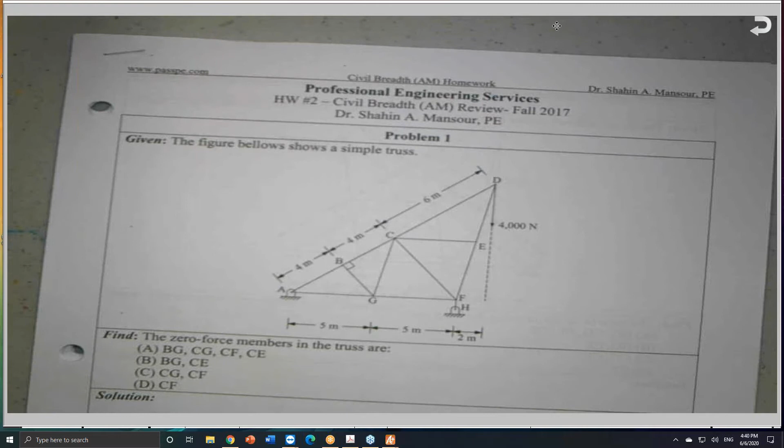The exams I sent you last time, if I remember correctly, were fall 2017 and fall 2019, exam 1 and 2. All these things were discussed or sent to you, 3 exams, and also the mini exams that I gave to those of you taking the class with me. So I would be glad to send all of them, I think 5 or 6 mini exams. Some problems are very similar to what is in these exams.

And also, by the way, I was teaching surveying today for California, and I decided to add 2 additional sessions for the California Special Surveying exam. The 2 sessions I added, I will make them free. I will send the ID for that if you'd like to attend the free surveying sessions, 2 additional sessions to help those taking the exam this month. I will send it to you also today. This is separate, so you have seismic and surveying. Let me get some paper here because I ran out.

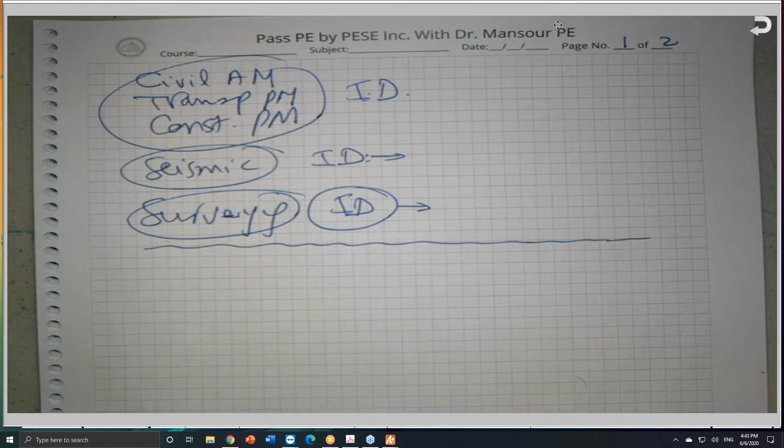For the exams, I hope that you get a chance to go over them, and I'm sure that you will have some questions, and I will be glad to answer any. I have all the solutions, some typed, some handwritten. It's just a matter of trying to push you or encourage you, let me put it that way, to do it on your own. At least you can challenge yourself, and when you get the solutions, you can compare it.

One topic that I received a couple emails from some of you about is Boussinesq's formula.

Boussinesq's formula is developed by this French scientist, and the increase in pressure due to a load can be calculated using this equation, or the nomograph that has been developed later on. So as all of us know, if this is OG, the original ground, and if you have a point like point A at a depth Z,

we have two types of pressure: the vertical sigma V and sigma H, horizontal and vertical. The vertical stress that will be developed at this location is basically due to the weight of the soil above this point A, whatever the gamma of this soil.

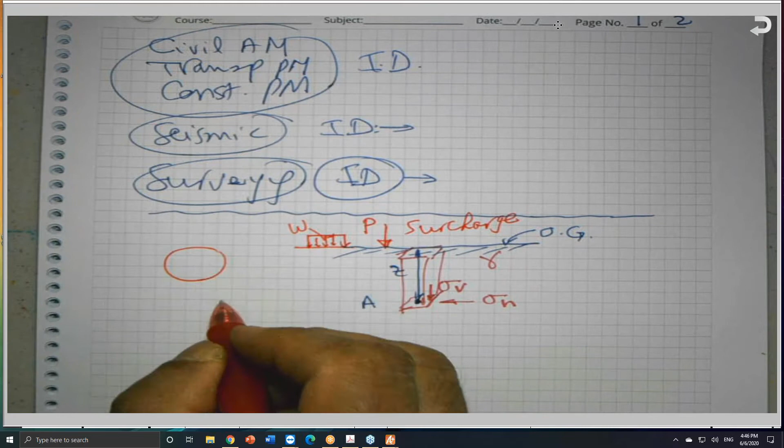And this surcharge could be either a concentrated load acting over a point, or it could be a distributed load, uniformly distributed. And this load, W, which is the uniformly distributed load, could be a rectangular load, a square, or a circular load, or a strip load, a strip over long, okay?

So whatever load we have on the surface of the ground, the OG, the presence of such load is going to increase the stress at point A, for example, due to one of these loads. And we need to know that. We need to know that.

You might be asked about this in either the AM or the PM exam. So the first equation that Professor Boussinesq developed is given as follows. Let me bring the equation and I will be glad to elaborate on it. In any geotechnical book or any review book, you will find this equation. Let me bring the equation. The equation by Professor Boussinesq is given. If you don't have the equation, I will be glad to make a copy of this and send it with my notes. It's called Boussinesq's equation.

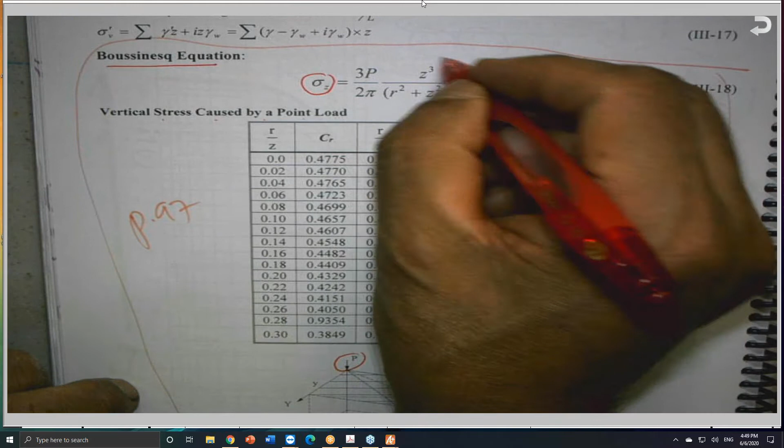This is the sigma z, the vertical stress caused by a point load. So the illustration that goes with this equation: if this is a point load P, a single concentrated load acting at point A here, and at any depth Z at a different location, I need to get how much the increase in stress due to this concentrated load. So this is what they call the vertical stress increase due to a point load.

This is the equation that I'm sure you saw before: under a concentrated load, 3P over 2 pi z cubed divided by r squared plus z squared raised to 5 over 2. Or we can use some kind of factor, c sub r, based on r over z, and they developed this table for us in order to get this coefficient c sub r. So you could use the original equation, or you could use the coefficient c sub r based on r over z. What is r over z? R is this distance here, the radial distance, radial.

R is equal to the square root of x squared plus y squared, so the radial distance equals the square root of x squared plus y squared. If I can get r over z, where z is the depth - how deep this point is below the load, and where this point is in relation to the load. If the point is immediately under the load, then r is equal to 0, because there is no x or y. But if the point is far away from the concentrated load by a distance x and distance y, we can get the radial distance using the Pythagorean theorem. So this is the original equation listed in geotechnical books.

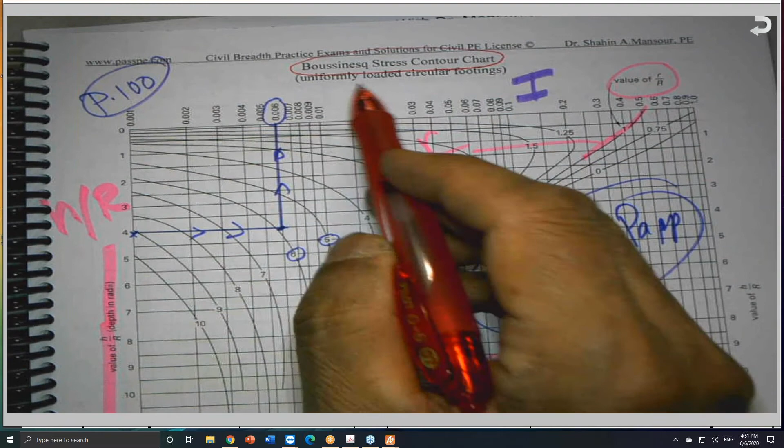After that, the Department of Navy took this equation and translated it into nomographs or graphs. So it is a Boussinesq stress contour chart. This is one of them, and it is for a circular load. So one map or nomograph is developed for circular load - so if the load is in the nature of footings, a circle or a column.

So in this case, with a circular load, we can find the additional stress. This is 2R, where R is the radius, so 2R is the diameter, D. So if you have a load in this nature, and you have the value of this load as a distributed load intensity, and if you know how deep it is - here using H instead of Z - and how far from the center of the load, call it R.

In this case, we can use this equation: delta, the increase of pressure, is equal to I times the application of the load - this is W, or the applied load. So I is called the influence value or influence factor.

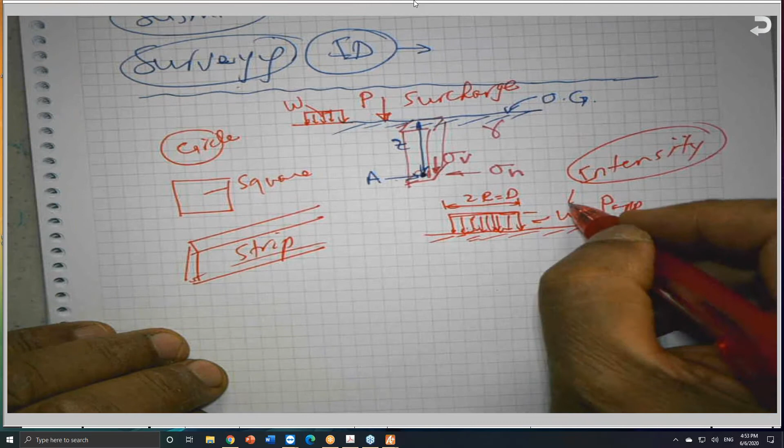Based on that, at any point at a depth H or Z, as he called it, at any distance from the center of the load, I can find what delta sigma V is - equal to I, the influence value, times W or P.

And these charts are available - I can send you a clean one if you want. This is for a uniformly distributed circular footing, and they developed one on the following page for a long strip footing, for a square footing, and there are many different formats available in most geotechnical books. So we need to understand how we can get the additional increase in stress due to a load acting.

I believe, if I'm not mistaken, there might be a problem here in one of the samples I sent you last time. If not, I can grab another set of questions - I might find one of these problems. Let me grab one of the problems in one of the mini exams.

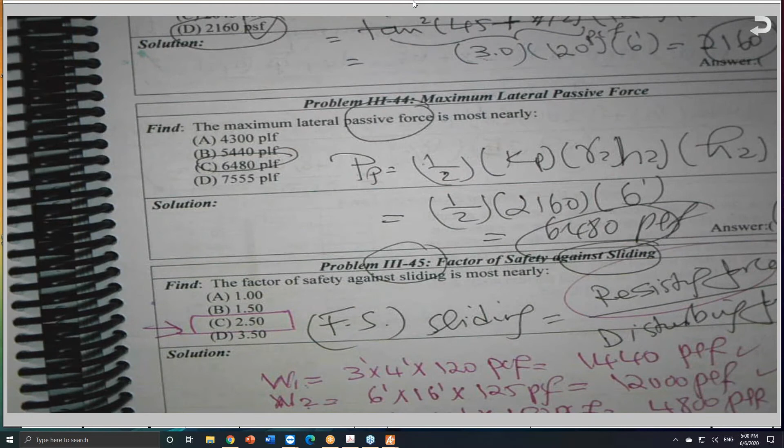It is not handy for some reason, so I will skip it until I locate it during the break, and I'm sure we will go over it. But basically, I can use one of my problems in this book here - I have two mini books in chapter 3, and we can apply it. After that, for the circular one, I can find it. For example, here is a problem, just one of the problems in one of my books.

A 1,000 pound point load acts on the surface of the ground. What is the stress increase 5 feet directly below the load? So basically this is a straightforward application. If I have a point load of 1,000 pounds, and this is the OG, he is asking what is the stress increase below the OG, at 5 feet under.

So this is 5 feet, H or Z, and this is point A. We are looking for the delta sigma V, the stress increase, and he's talking about the vertical stress.

In this case, the equation I showed you, the Boussinesq formula, I can apply directly. Sigma Z equals 3P over 2 pi, times Z cubed divided by R square plus Z square, raised to power 5 over 2. Or if I'd like to use the factor, C sub R times P over Z square. Either one will give me the answer.

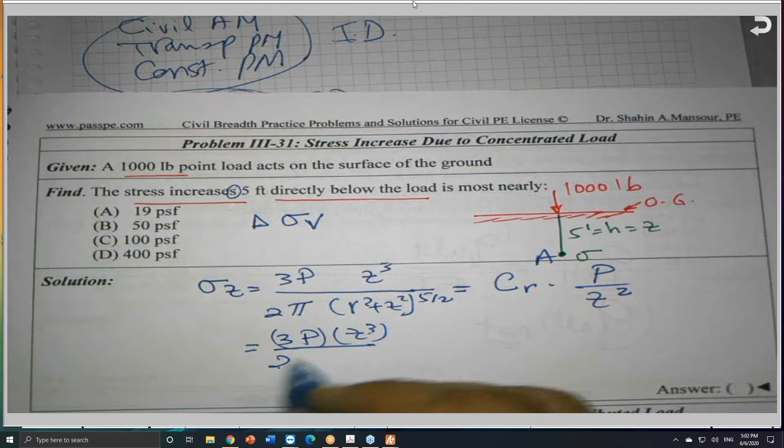Since this point A is immediately under the load, the radial distance is equal to 0. So I can say that this 3P and Z cubed divided by 2 pi, and since R is equal 0, this is Z square raised to 5 over 2.

I can plug the numbers now. The load P is 1,000 pounds, and Z is 5 feet, cubed, divided by 2 pi. Z square is 25 since 5 square is 25, so 25 raised to power 5 over 2. You will get an answer based on this equation.

If I decided to use the C sub R factor, I will go to a table like this, available in all geotechnical books. Since the load on the surface is a concentrated load, and the point is directly under the load, the radial distance is equal 0. So R over Z, R being the radial distance as illustrated in this diagram, will give me C sub R of 0.4775.

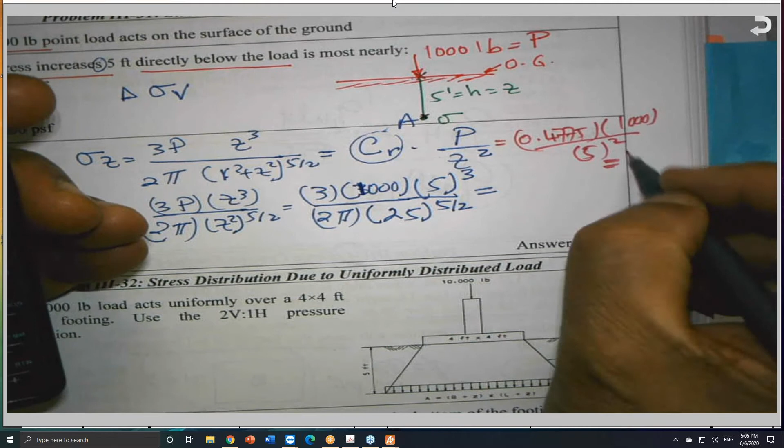This is an easy and straightforward problem. This is the increase in the vertical stress due to the presence of a concentrated load.

And this problem could be modified. Instead of directly below the load, it could be 5 feet away or 10 feet away, or he can give you a diagram where the load acts somewhere, and this is the point of interest. He will give you dimensions X and Y, and ask what is the increase in vertical stress. This is easy and straightforward, and I'll be glad to make a copy of this when I send it.

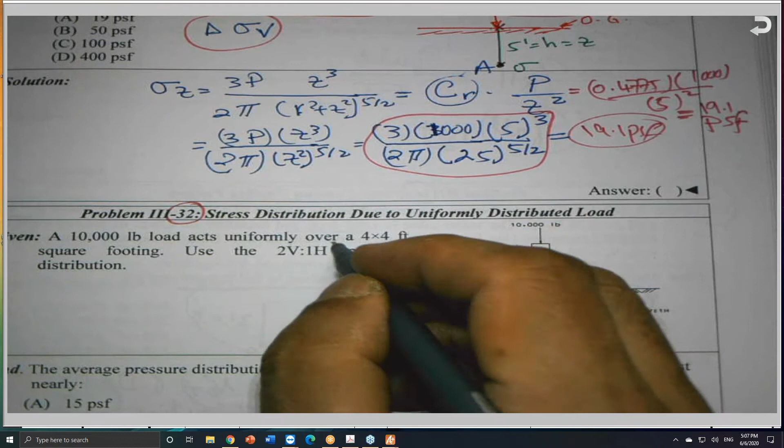But let me, since we are here, discuss another problem about stress distribution and average stress distribution using the 2-to-1 distribution method. If you have a load like this, 10,000 pounds, acting uniformly over a 4 by 4 square footing...

We know sigma equals P over A, this is normal stress or axial stress, P over A. So the stress at this level is 10,000 pounds divided by the area, which is 4 by 4 - how many PSF, pounds per square foot, since this is 10,000 pounds over 4 feet by 4 feet, a uniformly distributed load. We normally assume the load generates a uniform stress, except near the load where we have stress concentration - nobody will ask you about that.

But if I have a surface 5 feet below, what will be the average stress distribution on a plane that's 5 feet below the footing itself? So the depth here is 5 feet. One concept is 2 vertical, 1 horizontal.

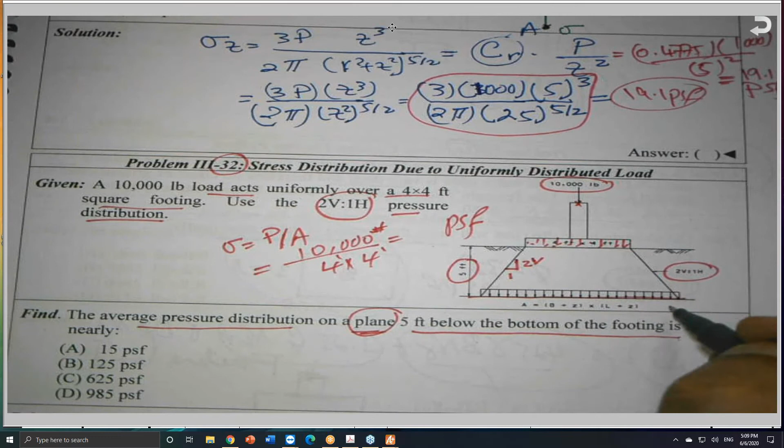Concept: 2 vertical, 1 horizontal concept could be used. So the surface area here, this 4 by 4 - right now the dimensions B and L, if B times L is square, in this case B equals L. But normally we express it as rectangular, and if given as a square, B equals L. At a depth Z, using the two vertical, one horizontal method, the new surface area is going to be B plus Z times L plus Z.

Because if this depth is Z and this represents 2V, the horizontal is half of it. So I have Z over 2 on each side. So half Z on each side, I will add it to the dimension B, and the same story with the other dimension. So this is the new surface area that will be available at a depth Z.

So in this case, we can say that the average stress, sigma vertical, is equal to the load, whatever the load is, 10,000 pounds, divided by the product of the two dimensions of that plane, which is B plus Z times L plus Z.

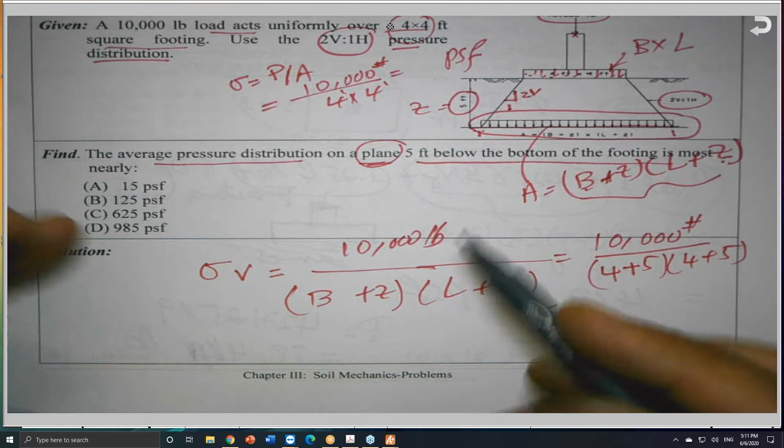B and L are equal because it's 4 by 4, and the depth is 5. So 4 plus 5 times 4 plus 5. So this is 10,000 divided by the surface area, which is 81, 9 times 9. So it gave me about 123.46 PSF. And this problem here, the closest answer is A, 19.1. And here, the closest one is 123, so it is 125.

So the stress increase or the stress distribution is very, very important. This is something that I need you to be aware of.

So the other cases, the one I was talking about, they are important and they are really sometimes tricky. And while I'm talking, I remember the problem, the one I was referring to. I may have it, and I did. I remember where it is.

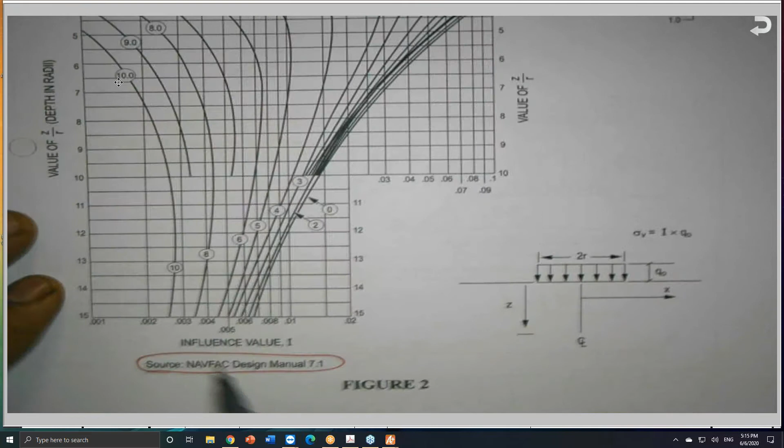So each footing is carrying 200 kips, a concentrated load. This is circular, so I can get sigma equals P over A. So the uniform stress that will be acting on each footing is P over A. P is given to be 200 kips. And the area, since the diameter is given to be 12 feet, I can say the area is pi D squared over 4, or pi R squared. I will use the diameter, pi D squared over 4.

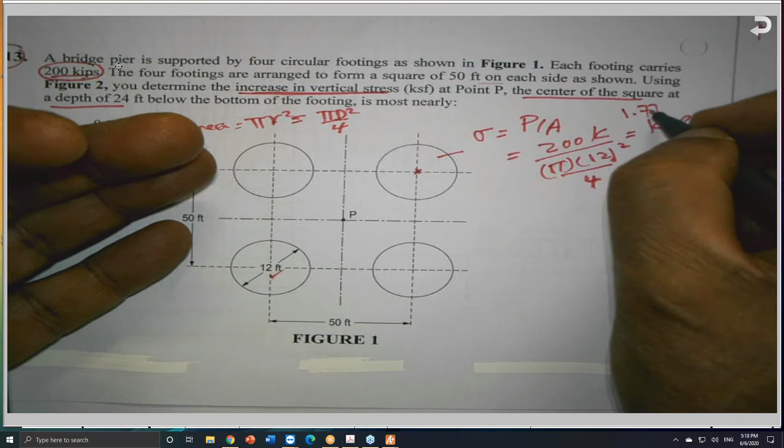So this is the first thing that I will do. I will convert the concentrated load into a uniformly distributed load over the footing as given.

The second step is, this is a circular uniformly distributed load, but the point that he is interested in is not under the load, is not at the edge of the load, but here.

And this is a plan view, by the way. This is a top view or plan view, whatever you like to call it. You are looking from the top.

So in this case, I need this dimension given and this dimension given. This is 25 feet from here to here and from here to here. But if you look to figure 2, the one they sent, or the one attached to it,

they are saying that if this is 2r, either uppercase R or lowercase r, they mean the same thing. So this is a circle like this, and he called this 2r, which is a diameter. And this is the center line. And this is the distributed load.

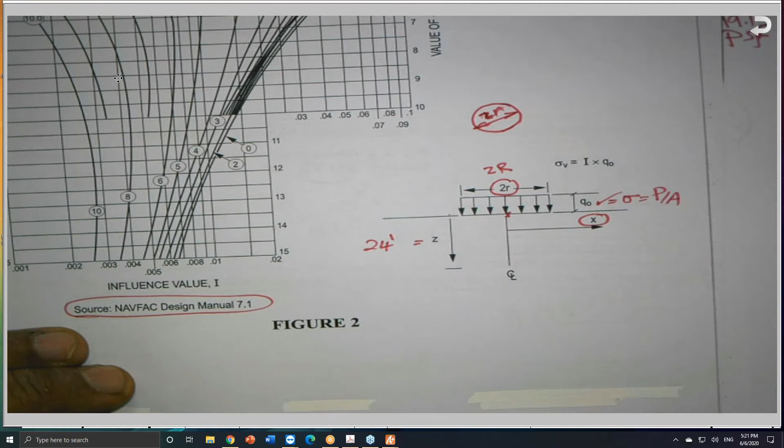But this is the center line. And this is the dimension X. If the load is exactly under the center of the footing, X equals 0. But as we move away from the center line of the footing, we need to know what is the distance X.

Because this nomograph, how it works, we have an X-axis and Y-axis, and we have some dimension in the middle. So the X-axis is the influence value I. This here, or this here, or this here, all these are I's, which is going to be used to plug into this equation, that sigma V equals I times Q sub O, or times sigma, as I define it here.

So this is the X-axis, these are the values. As far as the Y-axis, which is this vertical, it is the value of Z over R, depth to the radius.

The depth is Z, and the radius is given to be, this is 2R. That 12 feet, by the way, that's given. This is 2R, either lowercase or uppercase. Some books are using uppercase. So I know the R, or R equals 6 feet, because 2R is 12. And Z equals 24 feet.

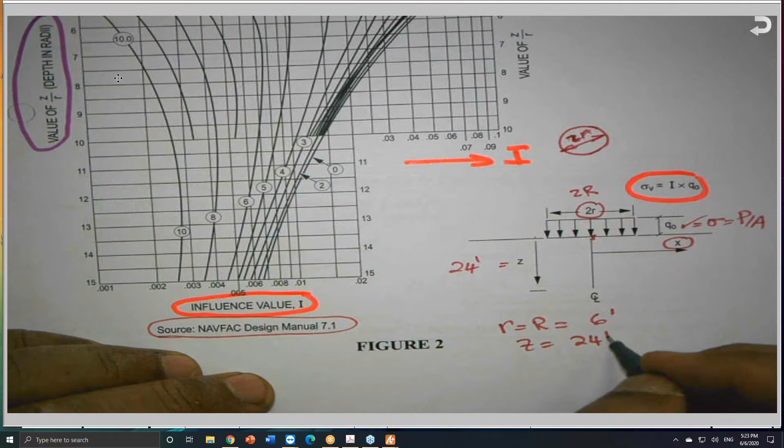So in order to get Z over R, I will say that from here, Z over R equals 24 feet divided by 6, equals 4. So this ratio is 4. And this is what you will see here, this is the vertical Z over R.

Now we are coming to the distance X, which is a series of curves as shown here. I'll use the green. It is the X over R. R is not the radial distance, it's the radius. So these here, they are X over R.

So these curves here, let me just highlight one of them. Not necessarily that one, the one we're going to use, but basically all these are the X over R. So I need to get X, and R already known to me.

And this is the most difficult part of it. If you look to the plan view of the problem, we need to determine which one is x, such that I can divide or get the ratio of x over r. Where is the distance x? The distance x, according to this diagram, is the distance measured from the center line to the point, whatever the point is.

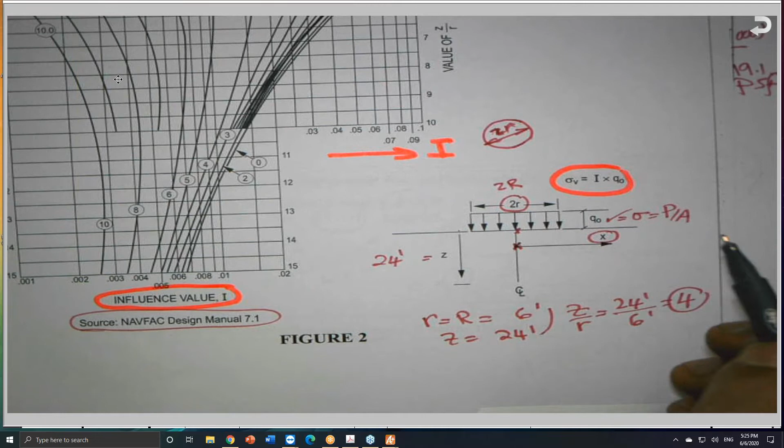If the point is here, so this is how far is x. If the point is under the load, exactly under the center of the load, x equals 0. As we go far away, x is increasing and the stress increase will be lower, or smaller. So my x in this case is the distance from here to here.

This is the x distance from the center of the load to the point of interest. I need you to remember that. It is not this 25 feet, by the way, and this is 25 feet also, and a common mistake is to take 25 and consider this the distance x. So in this case, the x equals what? X equals the square root of 25 squared, Pythagorean theorem, plus 25 squared.

So this distance is, let me do it. So 25 squared, and you multiply it by 2 and take square root, I get 35.36 feet.

Now I can get the ratio that I need in order to get the influence value I. I need to get x over r. X in my case is 35.36 feet divided by r. We said that r is 6 feet. So in this case, we have x over r to be what? 35.36 divided by 6, about 5.89.

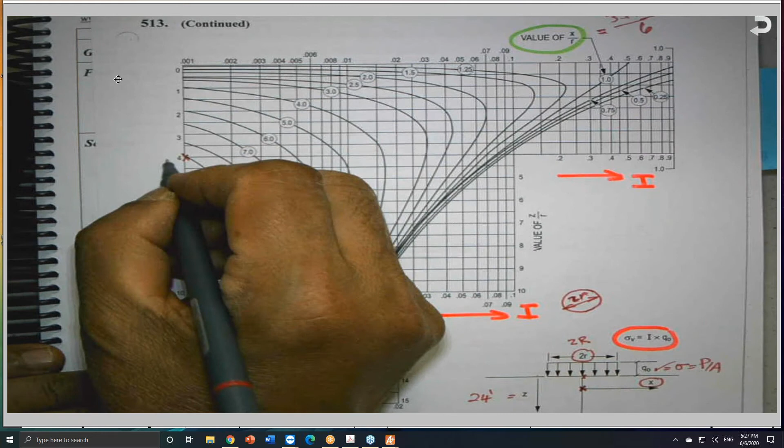And I need to pick the x over r, which is 5.89. So you can say about here is 5 and here is 6. So this is the 4, the 5.89. This is 5 and this is 6. So 5.89, it is somewhere here. Something like that. Here it is.

Use your best engineering judgment as far as linear interpolation. I know this is curved, but I think the answers given, if you look at the 4 possible answers here, they have 0.01, 0.02 double, 0.04 double the previous, and 0.1. So the difference is huge. So the rounding or reading the number from the graph is going to be a little bit tricky.

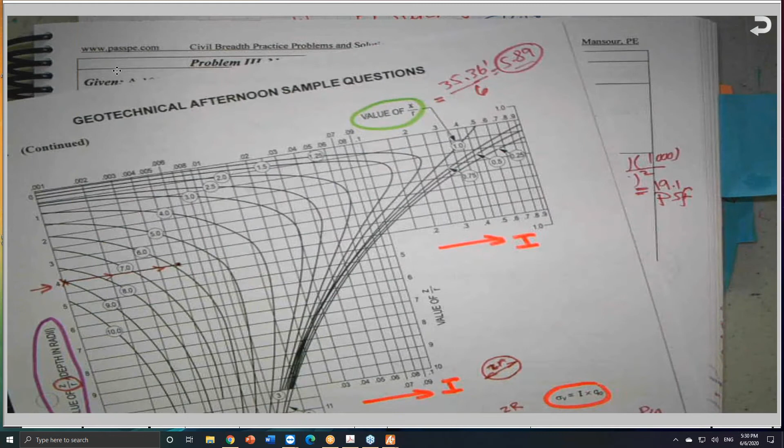So it's a good idea to carry 2 sets of squares with you, just in case. So I will move horizontally at 4 until I locate the point that I believe is close enough, 5.89, which is this number here. And in this case, I will go up and down. Here is the I, as I told you, it is the x-axis. So this is the I, and this is I, and this I, and this is also the I also. I should mention this also. This is I also, the x-axis or the horizontal.

So in this case, I will move vertically. Something like that. Very close to 0.005. So if you get close here, let me zoom in. So it is 0.005, a little bit beyond the 0.005. This is 0.006. If you'd like to call it 0.0052, I have no problem with that. So in this case, I will say that the I is equal 0.005. If you'd like to put 2, I have no problem with that.

So we are going to get the sigma v is equal to the influence value, 0.0052, times q sub o, or sigma, the one we calculate. Do you remember sigma is equal P over A, or q sub o? It is 1.77 ksf. This is the dimensionless quantity, by the way.

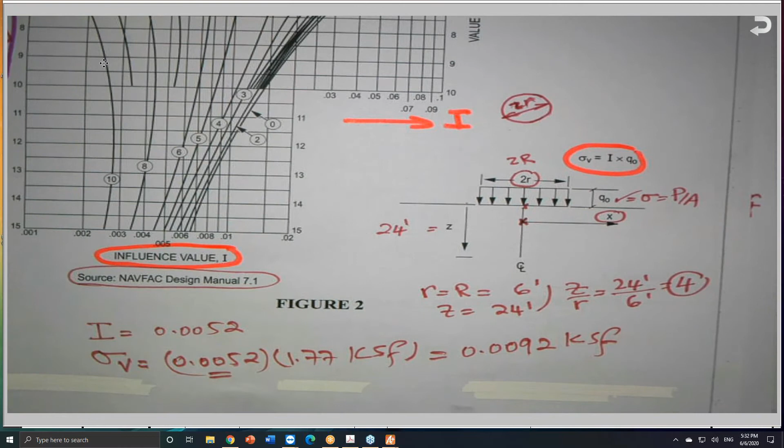So if you finish this, you will find that we do have an answer to match this. 1.77 times is giving you about 0.0092 ksf, kips per square foot. And you will find that, oh, he said most nearly, so probably I can round this to be about 0.01 ksf.

And you will pick it and go home happy. And it turns out this answer is the wrong answer. So they are giving you 4 possible answers to accommodate or to match the common mistakes that we did. Remember, we have what? We have 1, 2, 3, 4.

So this footing, it will increase the stress at point B by this value. But I do have 4 of them, my friend. So I have to multiply this by 4. Multiply by 4 and multiply by 4. If I forget the 4, you will find that answer. So in this case, the 4 times 0.01 is 0.04 ksf.

And this is the delta sigma V. I will call it delta sigma V. This is the increase in stress. And in this case, instead of the answer A, it became the answer C. And this is the correct answer. So when you receive it, look at it and let me know.

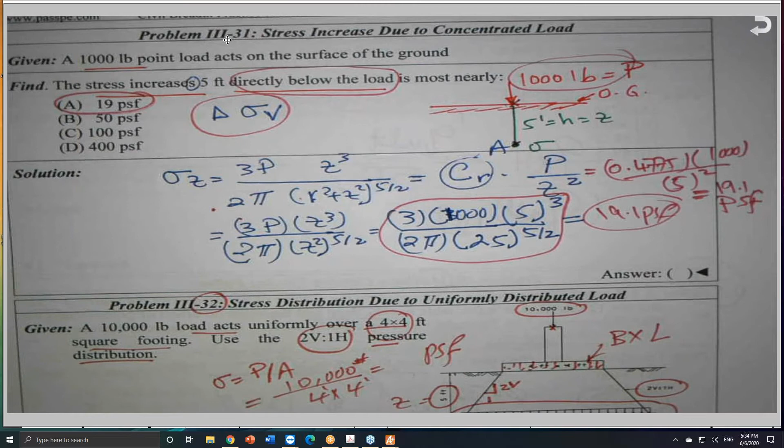There is another problem, I believe, in my book. Let me see if I have it. The one I was looking for, in one of the exams. Probably is not handy, but I will locate it and see.

If you do have a rectangular load, I believe this is the one I used here in one of the problems. Rectangular, or yeah, it is very important to know exactly where he is looking, like the problem we just solved together.

For example, this problem could be repeated again, and I need the stress increase under this here, under this footing number 2. If I call this footing number 1, 2, 3, 4, what is the stress increase at the center of footing number 2 due to all of them?

So in this case, I'm going to treat each one separately. This one here, under the center of the load, it will be different. This load here, from here to here, is a distance. From here to here is a distance. And from here to all the way is a distance.

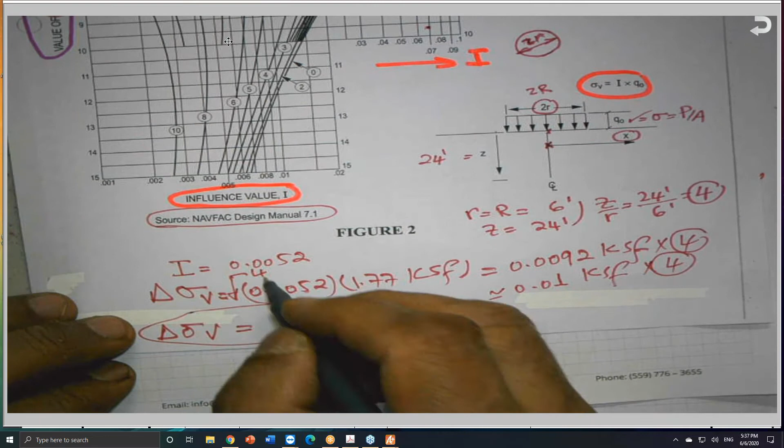This is why I said don't forget to multiply by 4, because if you did not multiply by 4, that means you are taking the influence or effect of only one footing, which is not the case, he's asking for all of them. But if this question is changed such that he needs the stress increase under a different point other than this point here, the calculation will be completely different.

Okay, and I will be glad to include a problem like this in the future. I think I have something similar to this.

And the rectangular ones, we have to be careful also, because the dimensions - for example, this one here, this is what I was looking for. This is another nomograph for a rectangular or a square. Let me grab a clean copy, and I will send it to you also.

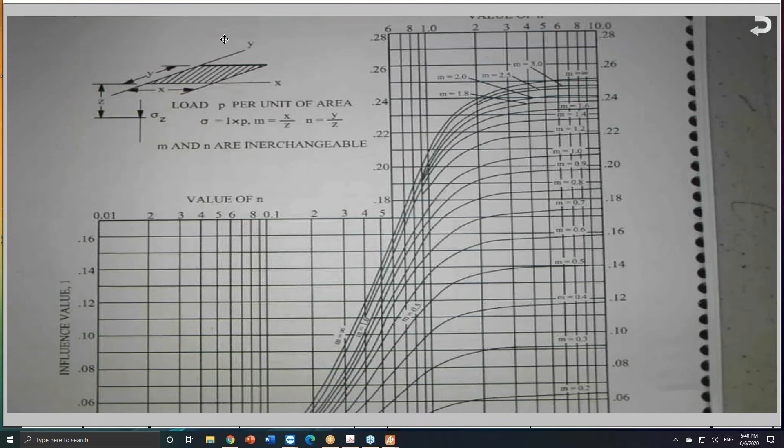Yeah, and here it is. So I made a copy of these two sheets that I will also include. And the best way to understand these things is to go and practice. I believe I have some problems, I don't know if they are included, but this is again from the Foundations and Earth Structures by the Naval Facility. At the bottom here, the source is given.

So this is the vertical stress increase under rectangular load. And I said rectangular or square load - square load, sorry, square load. And they give us this here, the X and Y.

And also we are looking for an I, the influence value. But the influence value in this case is not horizontal, it is vertical. So the I is here, which is the same I is here.

And there are two parameters I need to determine before I can pick the I, the influence. I need the value of M and the value of N. This is N as in Nancy, and the horizontal value of N, or the value of N at the bottom here.

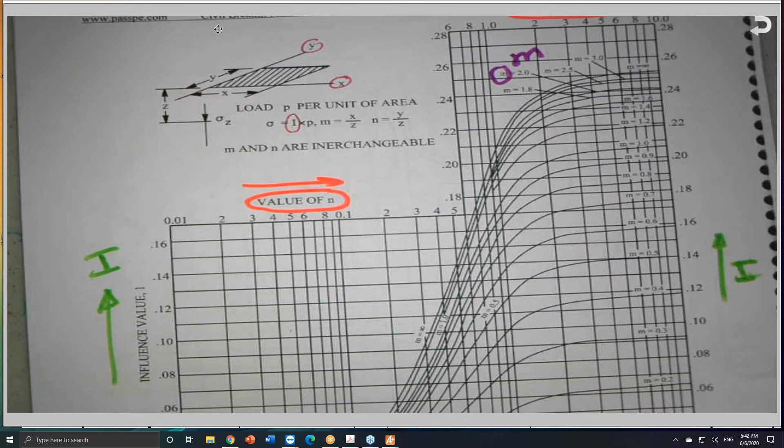This is the N, and the series of curves, you can see this is the M. M as in Mansour.

What are the parameters that will contribute in determining M and N? They are given here: M is X over Z, and N is Y over Z. And they mentioned that the M and the N are interchangeable - you can call this M, it does not make any difference.

However, this diagram is very, very important, because the problems that you might see on the exam are not easy and straightforward. They are tricky, in a sense that this is a dimension Y and this is dimension X. This chart will give you the stress increase at this corner here, at a depth Z, which is sigma Z, at this corner here.

So the stress increase at the corner. This is why if you are given a rectangular load or a square load, and he asks you what is the stress increase at the center, do you remember the 4 footings? Here, the load is acting over this slab, but I need the stress increase at the center.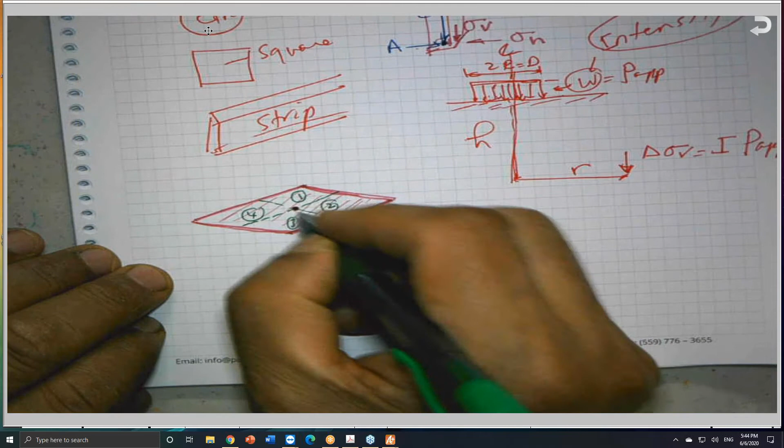In this case, I don't have a chart directly like this, but I can create a chart, or I can divide this load, or break the area into something like that. I will call this area 1, area 2, area 3, area 4. So each area, whatever the dimensions X and Y, will be at the corner, at the corner of each one. So I created something like that.

There are many problems related to this concept, because he's asking to get the stress at the center at a certain depth Z. But there is no such map given directly like this. I need to get it, so in this case, I can divide, I can play around, or I can divide it up.

Unless the footing is a square, a square which also has a picture - here it is, a square. They came up with this chart. Also, it is the same Boussinesq stress contour chart. This for a square footing, and this for a continuous footing.

Strip footing, they call it infinitely long footing. They came up with the width B as in boy, and the pressure distribution is P as in Peter, and they came up with vertical distance and horizontal distance. The vertical distance in terms of B as in boy, this is the depth, and how far from the center of the footing, B or 2Bs or 3Bs and so on. So this is another illustration available in geotechnical books, and I made it here for you.

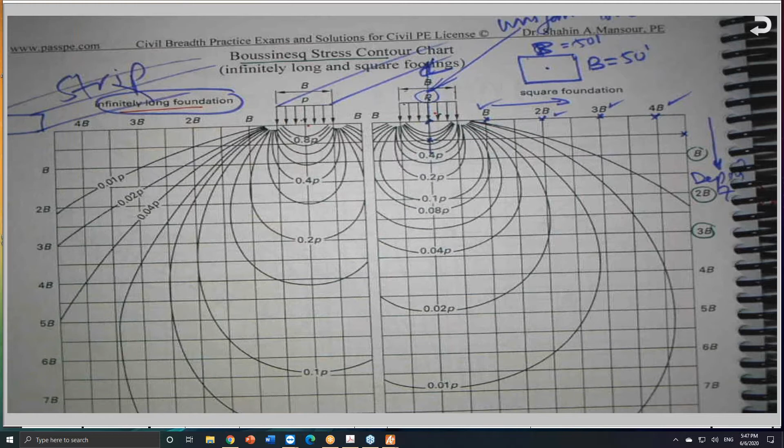So the second topic, let me put this far away from here so at least I can include it. According to this, I need to go over the soil classification. I started last time, and I told you there's a problem, I believe, in one of the practice exams that you received from me. If I'm not mistaken, let me try to remember which exam. It does have, either this or this.

Yeah, here it is. This is the fall 2019 exam. This was sent to all of you last time. I don't know how many problems you solved so far, but please do your best, and I will do my best to get the solution, handwritten solution, or type solutions, it depends. So the problem that I referred to last time is this problem here.

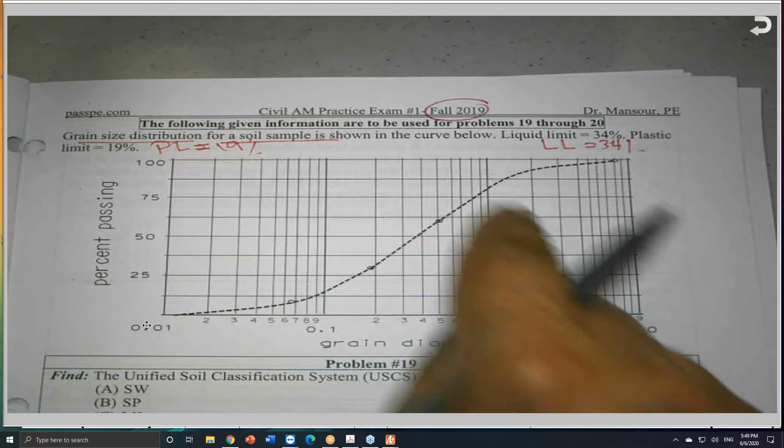This is a fall 2019 exam, and the grain distribution for a soil sample is given, and the liquid limit is given to be 34%, and the plastic limit, the PL, is given to be 19%. So the grain size distribution could be given to you in the form of a graph like this or a table. Both of them are subject to be included in the exam, and I will show you both. So this is a graph.

This is the grain diameter in millimeter, and it increases as we go this way. And this is the percentage, the percent passing.

As we discussed last time, the two systems, the USCS, Unified Soil Classification System, or the AASHTO system, both of them depend on two parameters or two quantities that must be known. I need to know the grain size distribution, either from the sieve analysis if the soils are coarse, or from the hydrometer if the soil is classified to be fine like silt and clay. So the grain size distribution must be given to me. The sieve analysis as you do for coarse like sand and gravel, and the hydrometer we use for silt and clay.

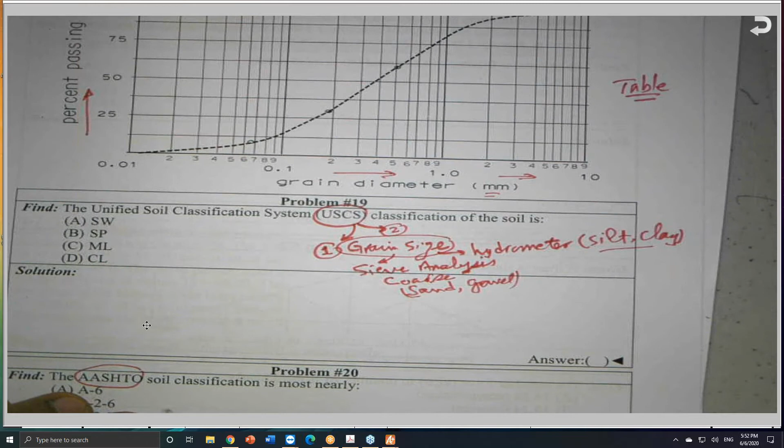So this is the first set of information I need, which is given to me in the form of a graph. It could be given in the form of a table. And after the first set of information, I need another, which is the liquid limit and the plastic limit.

Liquid limit and plastic limit, where I can get the PI, plasticity index, which is liquid limit minus plastic limit. In this case, the liquid limit is 34 minus 19, the plastic limit, so this gives you 15%.

We call these liquid limit and plastic limit Atterberg limits. Atterberg was a Swedish professor. So the Atterberg limits are required: liquid limit, plastic limit, and we can get the plasticity index and other parameters.

This is from the NCEES AM Blue Book, where there was a question we answered together, if I remember correctly. For those who attended before, forgive me if I repeat things. Question 130 of the Blue Book: the most essential criteria for proper soil classification using the Unified Soil Classification or the AASHTO Soil Classification System are...

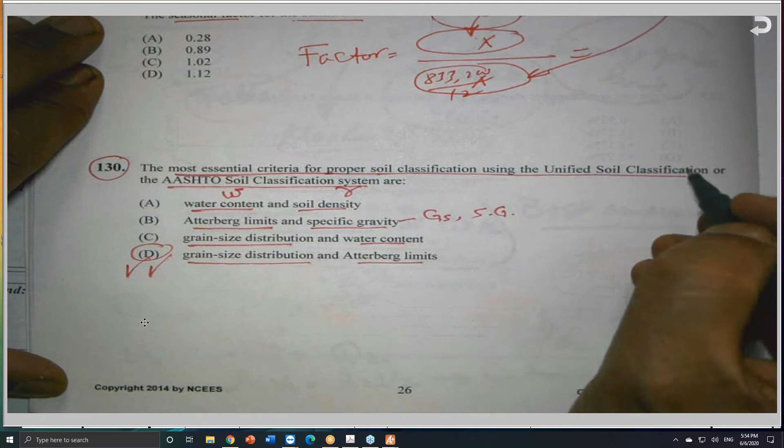And this is the answer, D. So to classify the soil using the Unified Soil Classification System, or the AASHTO system, both need the grain size distribution either in a graph or table, and the Atterberg limits, the liquid limit and plastic limit, which could also be given in a graph.

Normally they give us numerical values and we enter them because we are going to use something called the plasticity chart. What is a plasticity chart? They developed for us a plasticity chart to be used to identify or classify fine-grained soil.

As you can see here, this is a log scale. If you go to the USCS in any book, you will find there is a chart and a table for the USCS, and this is in chapter 7 of my book. Let me go quickly to chapter 7 to locate this chart.

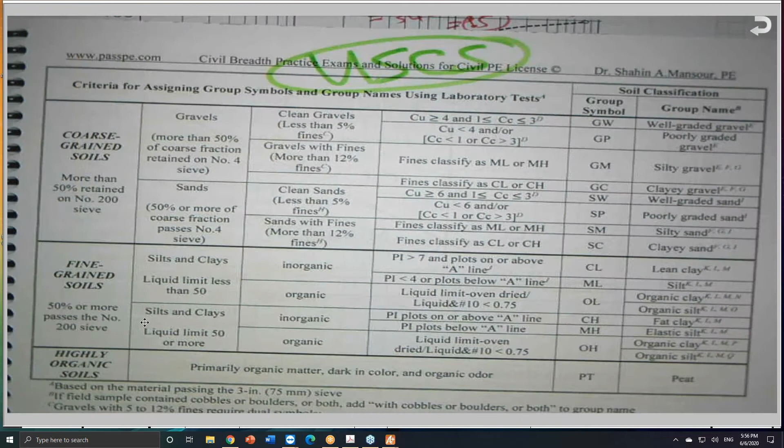And yeah, here it is, the famous table and the chart, the USCS, Unified Soil Classification System. This table is divided into three main categories or three main sections.

This section here is for the coarse-grained soils, which is the group symbol you'll find starts with G or S - G for gravel and S for sand. So I have to decide if I am in this box, or there is another box below it for the fine-grained soils - here it is, the blue box.

This is for the fine-grained soil, where our ultimate goal is to pick one of these names or group symbols. This is a single one. We also have dual symbols - we call it dual, not double, dual symbols.

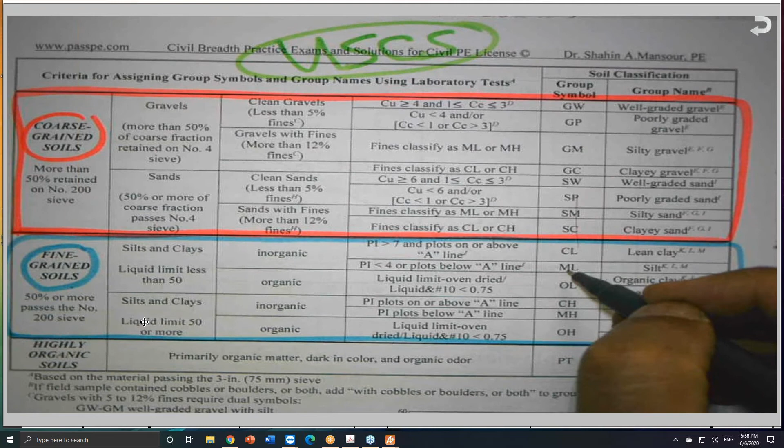So for the silt and clay, we are talking about C for clay and M for silt, and O for organic. Since they used S already for sand, they don't want to use S again for silt, so they came up with M.

And there is another row at the bottom, which some books even drop or don't include. This is for the highly organic soils, which is primarily organic matter. These types of soils are not suitable at all for any kind of foundation, because we need to know the type of soil or group symbol to determine the suitability of the soil for any foundation that will be built, or for any pavement job to support the pavement.

So we need to know the group of the existing soil, and based on that we can determine how strong the soil is, whether it can support the load or not, how much settlement will happen, and so on. This is the purpose of the classification. There are good soils and bad soils, which I'm sure you already covered in soil mechanics and in other classes like geology. Normally this highly organic group has a symbol PT.

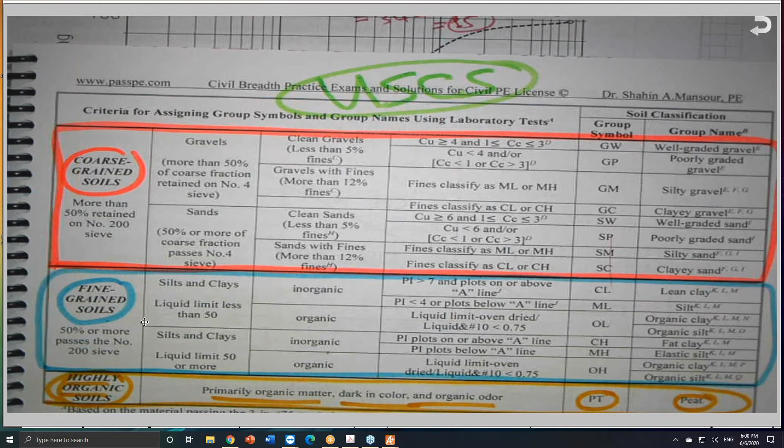It's not normally asked because it's very easy, but we need to decide if we are in this box here or this box here. In order to determine if I am in the upper box or the lower box, the coarse or the fine, I need to know how much is the percentage retained on number 200.

So number 200 is very, very important, sieve. Number 200 means that we have 200 openings per linear inch, not per square inch. So imagine there is 1 inch length and you have 200 openings. So how much is the diameter of each one of them?

This graph here doesn't show that. Some graphs have the diameter in millimeter and put on the other side the size of the sieve. For example, let me see if my book is handy. But you have to be ready for both of them.

So, for example, you might see something like this. This is another grain size distribution graph. Let me zoom in and I will tell you how to solve this issue.

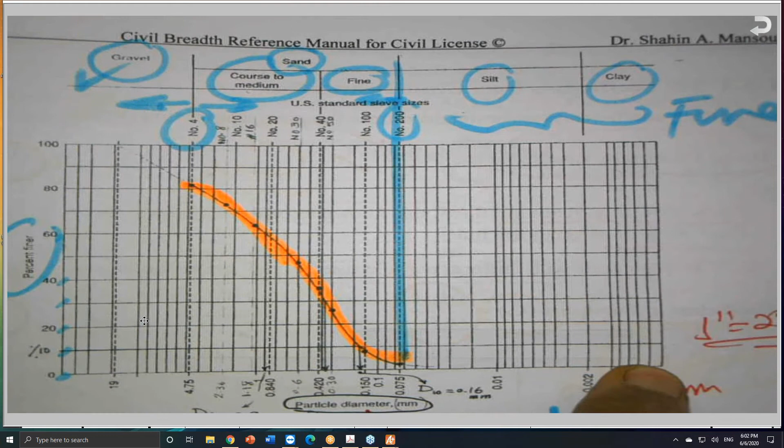Here on the x-axis, they give us the particle diameter in millimeter, exactly as given, and this is the curve. But here, in addition to diameter in millimeter, he's giving us the sieve number, for example, this number 4. Number 4 is very important, and number 200 is very important. These are the two numbers I highly recommend you remember the size of the opening.

Because number 4 will separate the coarse, the gravel, the coarse aggregate as we call it. So number 4 has 4 openings per linear inch. Anything retained on number 4 we call gravel, or coarse aggregate in concrete mix design. So 4 means it has 4 openings per linear inch - 1, 2, 3, 4.

So the opening for number 4: 1 inch is equal to 25.4 millimeter. I know you hate the SI units, but we have to deal with it. So if you take 4 openings, you divide this number by 4, but we consider the wire diameter, and this is why the diameter of the wire for number 4 should be subtracted. This is why if you go to any ASTM book, you'll find number 4 is not 6 millimeter, it is only 4.76.

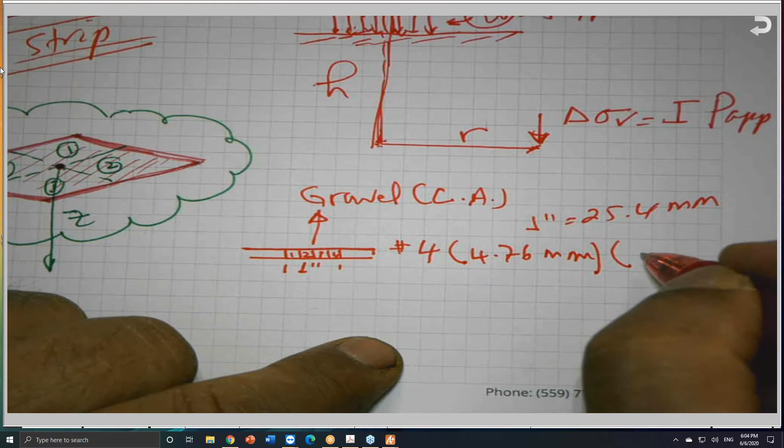So number 4's opening is 4.76 millimeter, or in inches, 0.187. It's not a quarter inch, not 0.25 inches, because the wire diameter should be subtracted. So anything retained on number 4 is coarse aggregate.

Anything that goes through could be sand, silt, or clay, but number 200, which has 200 openings per linear inch - again, this is 0.075 millimeter as the opening.

Anything retained on number 200 is sand. Anything that goes through number 4 and is retained on number 200 is sand. Anything that goes through number 200 is silt plus clay. Silt is coarser than clay; clay is the finest one.

So the sizes 4.76 and 0.075 millimeter are required for a problem like this, because unfortunately he did not give us... let me get the problem one more time. Here it is - he did not give me where number 4 and where number 200 are.

So in this case you have to be ready. You have to say, okay, this is 0.1, and we said that number 4 is 4.76 millimeter. So number 4, I'll write it down here: number 4 is 4.76 mm, and number 200 is 0.075 mm.

Every time I solve a problem, or you solve a problem, I recommend you remember this, because I need to get the percentage to decide if I am in the coarse zone or... okay, but the 4 answers here have S, S, M, and C. Oh, he makes all of them - I have S for sand, M for silt, and C for clay.

So how to read this? As I told you, it started from here, 0.01, and this is 0.1, and this is 1, and this is 2, 3, 4, and so on. So 4.76 millimeter - this is 4, and this is 5. So 4.76 is somewhere here.

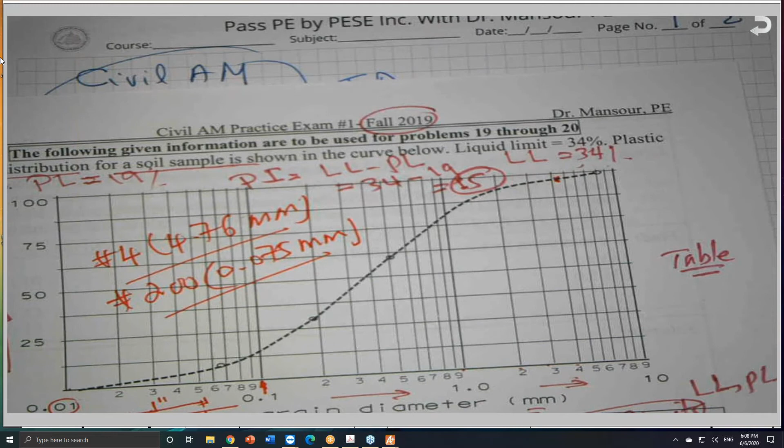And 0.075, this is 0.01, 0.02, 0.075, somewhere here.

I hope that the graph that will be given to you is drawn to a good scale. So in this case, I can draw a parallel line here and get the percentage. Okay, so I will draw, try to do your best to be accurate as much as you can.

And the other one is somewhere here, because number 4 is going to determine if I am...

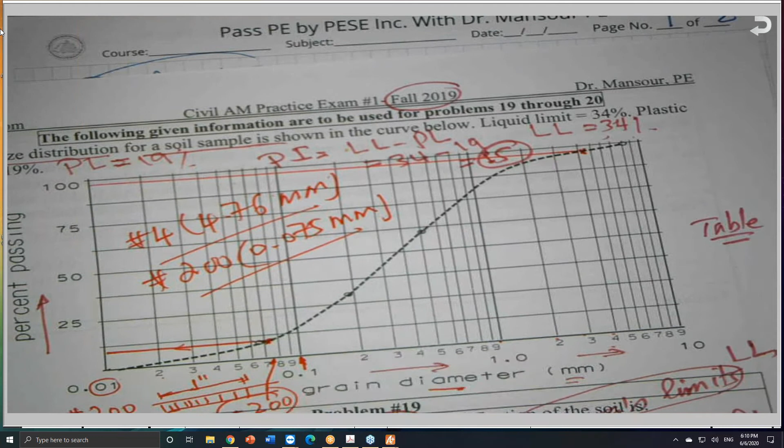So obviously the number 200, which is at 0.075, this number 200, if you would like to draw something like this, and this is 200, and this is 12.5%, and this is 0, and this 25%, and so on.

So if we go to this chart right now, or this table, say that I am on the top, on the coarse size, if more than 50% retained on number 200. But the fine, it is 50% or more passes number 200.

So I have here only 12, and I have here, less than 12. I have almost 12, 11.5, or maybe 10.9.

So what conclusion can we make from here? That if I have this, and we need to translate this into some kind of - okay, normally I said here it is number 200.

What is retained and what is passed? Okay, normally, they use these words a lot: retained and pass. Pass or passing, percent passing or percent.

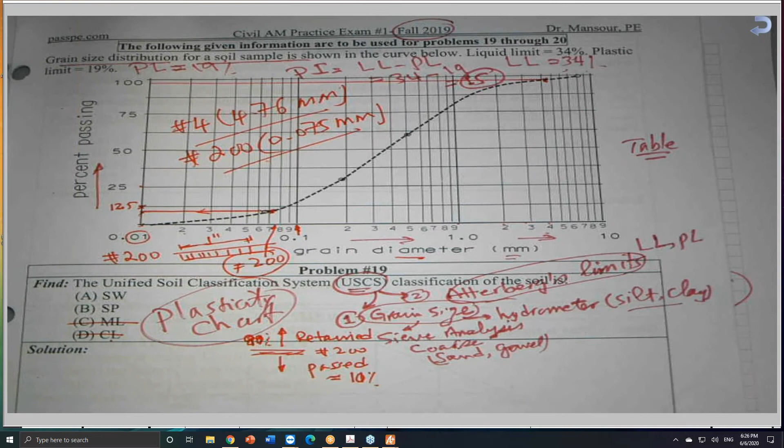So 90% retained. So immediately, the moment that I decide that more than 50% is on number 200, I am in this box. So I am either S, which is sand, or G. So right now, by the process of elimination, I can eliminate two answers: the clay and the silt.

So SW or SP? W stands for well graded and P for poorly graded. So the process of elimination is good, and we need to get benefit of the process of elimination by getting rid of the answers that do not make any sense or don't match our findings. So right now I am between these two, at least 50-50.

If you have only 1 minute left, and by doing just number 200, and you know where 200 is, you can narrow your choices to 50-50 instead of 25%. This is 50-50, pick one. I have only 1 minute left, and I will pick one and pray to God. Maybe God will accept my prayer, and I will pass.

But right now, we are here. If you look to number 4, number 4 is another sieve, which is very important. Here, I know the two answers left for me are SW, well graded, and SP, poorly graded, which are the two answers here.

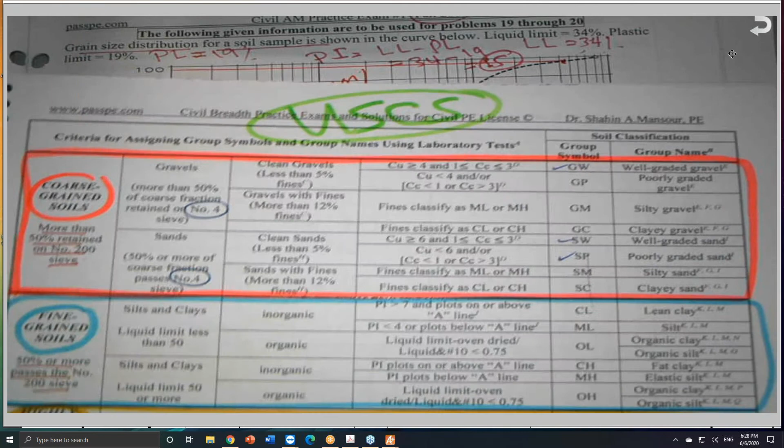SW and SP, which is the well graded sand and poorly graded sand. So the gravel is not part of my discussion. So I am not worried too much about number 4.

Okay, but maybe they are going to mix the G and the S, so in this case, you have to - so we start from left, after I decide which box, and after that I start to narrow my choices as I move on. If I am in the upper portion here of this section, I am in the gravel section, this starts with G. If I am here with sands, I start with S. And if I am in sand, I have to go and narrow my choices and keep narrowing until you come to one of these answers, and this will be the correct answer.

So if it's sand, if it is 50% or more, pass number 4, because number 4 is the one that differentiates between gravel and sand. So I am in the sand. He said sands with less than 5% fines. What do you mean by fines? The fines are the ones that pass number 200. We call them fines, which is the silt and the clay.

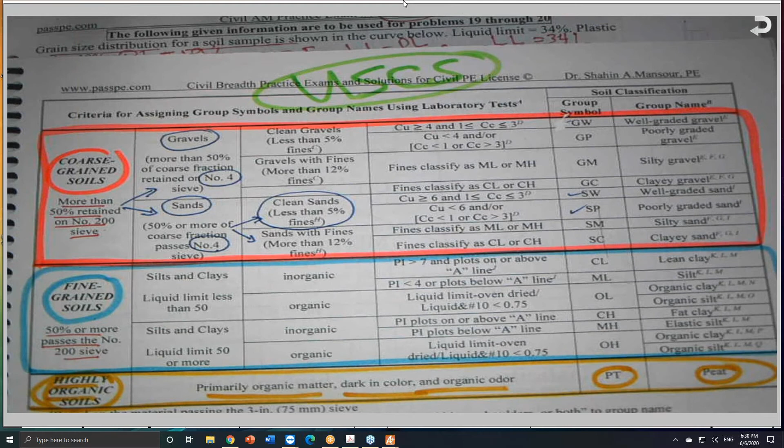So I have here less than 5%. No, I do have a sand, the other one: sands with fines more than 12%. I have 10 and a half, or I have 11. If I take 10 and a half or 10, I have 10%. So less than 5 and more than 12 — I got confused. So I will move forward to see who is going to help me.

We have two quantities called C sub U and C sub C. These two are given here: C sub U, uniformity coefficient, and C sub C. We need to get these two quantities. C sub C is defined as D30 squared divided by D10 times D60. You don't have to memorize these equations. The C sub U, uniformity coefficient, is equal to D60 divided by D10.

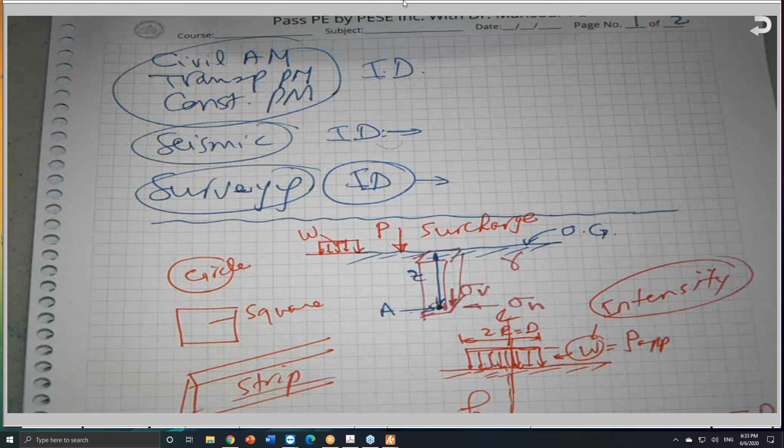The gradation curve — if you look at the gradation curve, so if this is the gradation curve, and if the curve is given like this, carry it all the way to the end. This is the diameter, and normally this is log scale, diameter D in millimeter. This is the percent finer by weight on the y-axis. So if this is 100%...

So the D60, D30, and D10 are like this. I will come at 60% and draw a horizontal line to intercept with the curve, whatever curve this is. We'll call this D60. Same story for D10: I come at 10% and draw a horizontal line until I hit the curve and come down. We call this D10. This is how we determine the diameter for 60%, 10%, or 30%.

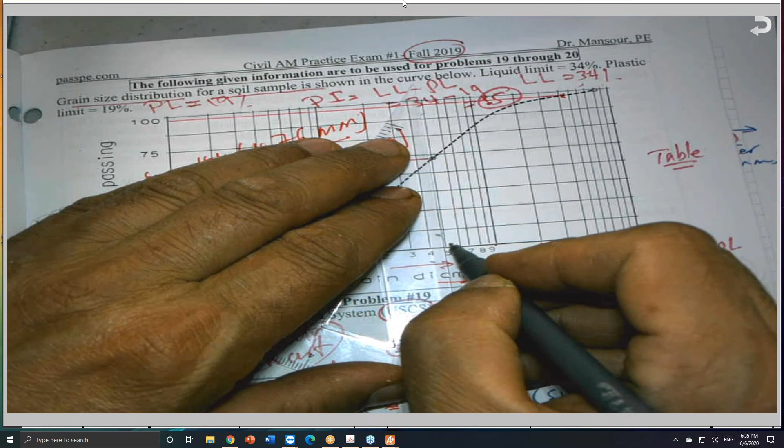So if we look at this and determine these quantities: 30, for example, this is 25, so 30 is somewhere here. This is 62 and a half, so 60 is somewhere here. And 10 or 11 is somewhere here, the one we just found. So basically I will draw these horizontal lines and try to get D60 and D30, and come down and read them as accurate as I can. So this is the D30 and this is the D60, the diameter for 60% and so on.

Please do it, and when we meet next time you can tell me if I got C sub C a number in the neighborhood of about 0.99, and C sub U I got a number of about 7.7. So this will help — these two numbers, C sub C the curvature coefficient, and C sub U the uniformity coefficient, will help me narrow my choices right now.

So when you have C sub U, I will focus only on the two answers at the left, which is SP and SW. So right now, for SP and SW, so I am here: SP or SW, well graded sand or poorly graded sand. If you look at this, you will find that C sub U is greater than or equal to 6, and C sub C is between 1 and 3.

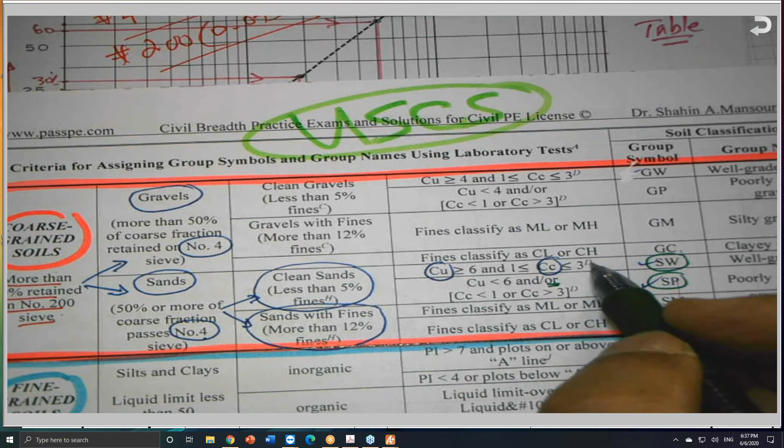And the second one, which is SP, is C sub U less than 6 and/or C sub C less than 1 or C sub C greater than 3. And again, there are footnotes here. Okay, we have a lot of footnotes, by the way. For example, the D defines what C sub U and C sub C are. We need to pay attention to all those footnotes.

So I pick which one is the best. They are looking for the best answer. So I have C sub U greater than or equal to 6. I have C sub U of about 7.7. And the C sub C of 0.99 is very close to 1. So the best answer right now, and the word "and" is very important, because they are using "or" and "and." You have to pay attention to that.

So probably the best answer right now is SW, because this will match, and I selected the answer A in this case, which is SW, or the answer A. Look at it, and if you disagree with me, please let me know, and we can discuss it next time. The second approach is called the AASHTO approach.

And the AASHTO approach is called the A system. Here, by the way, do I need to use the plasticity chart? Before I forget, this is the plasticity chart. It's given on the same page. I have it a little bit bigger in my books. I try to draw it as big as I can. For example, I have two of them: one simplified and one detailed, the one that has the A line and the U line and all these things. We can talk about this later when we have a problem.

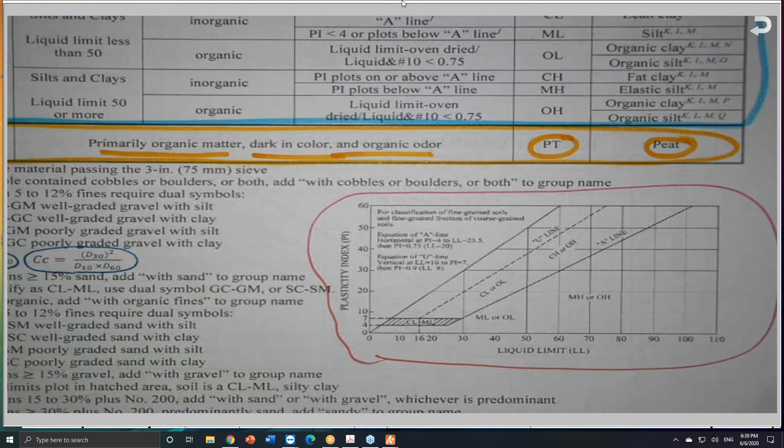Do I need to use the plasticity chart? No, because I don't have fines. I don't have the choice, which is sand with fines more than 12%. I have only 11%. So in this case, I would need to classify the fines as either ML or MH to get the SM, or look at the other option, which is this one here, which I am not. So I'm talking about the C sub C and C sub U. So there is no need to use a plasticity chart because it's not required.

For the second method, which is the A system, the AASHTO classification system, this started way back in 1929 for the sake of determining the most suitable soil for pavement, because AASHTO started with pavement. So they came up with this chart, and again, this chart can be said to be divided into two main sections. This one here is where granular materials are less than 35% passing number 200.

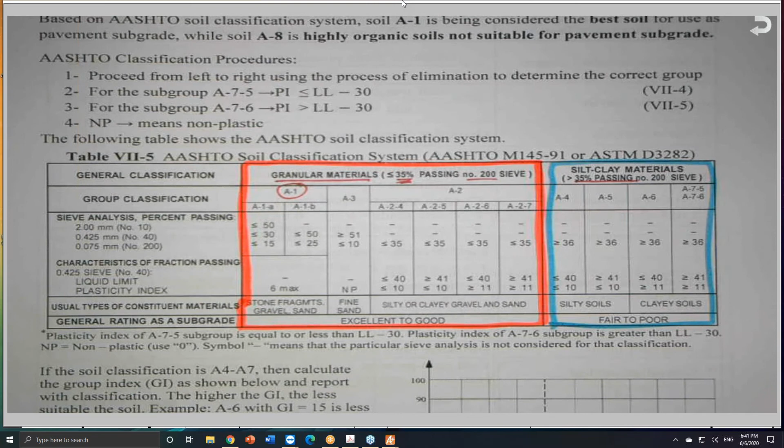And the other section of this table is the blue one here, which is the section where more than 35% passes number 200. This is the silt and clay material. This is granular, if you like to call this coarse, and this is fine. I have no problem with that. And they start with A1, A2, A3, A4, A5, A6, and A7. The A7 is divided, by the way, into A7-5 and A7-6.

There is another column here, by the way, but it's dropped. Some books have it, which they call A8. A-8 is the worst soil. It is very bad soil. It has a lot of organic materials and is not suitable at all for any kind of roadway design. So some books have it, some books don't. But generally speaking, we start from A1. Based on the AASHTO soil classification system, soil A1 is considered the best soil as a pavement subgrade, while soil A8 is highly organic and not suitable for pavement subgrade.

So this is why, with A8, some books have it and some don't. This table, which we adopted, is not, I believe, adopted from AASHTO, so from the NCEES, sorry, so they didn't show the A8, but the A8 is the worst one. Like the previous table for the Unified Soil Classification System, we have this row here, which is PT. This is a soil that even some books drop completely because it is classified very easily. If any soil has all these bad things here, it's classified as PT and so on. So the same story with the AASHTO.

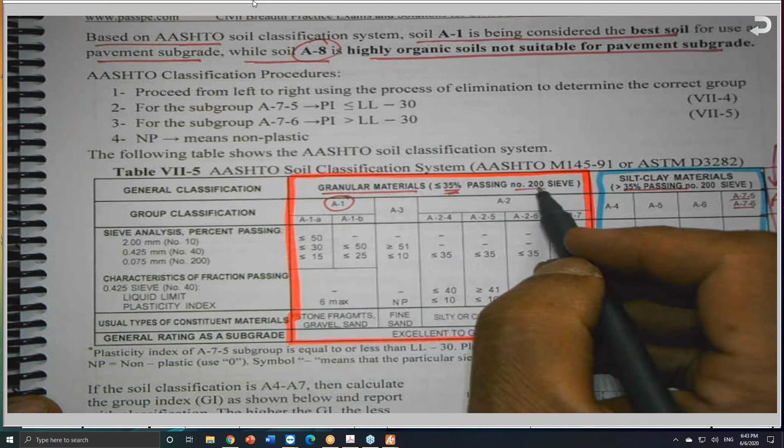So for the AASHTO, we need to determine the percent passing number 200. If you remember number 200, we have only 10% passing. So based on this, here is number 200. I have about 10% or 11%, and what is left here is 90%. This is called retained, and this is called passed. If the information is given to you in table form, by the way, be careful, because retained versus passed is very, very important. So the percent finer is called fine material. Anything passing through number 200, we call fines. So it is just 10 to 11%, so it is less than 35%. So I am here.

So I am in this box because I have less than or equal to the number 200. I have only 10% or 11%, whatever number you agree with. So I am here. Since I am in this box, I will limit my discussion.

I said number 10, number 40, and number 200. And by the way, the sizes are here. Do you remember the 0.075 for number 200? If you forgot, it is mentioned here. And after that, they are saying what is the liquid limit and the plasticity index.

So for number 200, I have less than 15%, or equal, less than, almost, this is 10%, less than 35, less than 35. So any of them could really be, except this one here, the 10%, yeah, A3 is out.

But if you look at the liquid limit, it's the 34% that's given. So I will come here for the liquid limit and see less than or equal 40, yes. A greater, no, this is out. Less than, yes. A greater than, this is out. So the process of elimination eliminated 2. Let me get closer here, you can see it. And...

I will go to the plasticity index, PI. So I am either this or this. This is the plasticity index, 15, the one I got. So I am looking at these two options. For the plasticity index PI, you will find that less than or equal 10, so this is out. Greater than or equal 11, so it is A-2-6. And this is why I will select the A-2-6 as my choice.

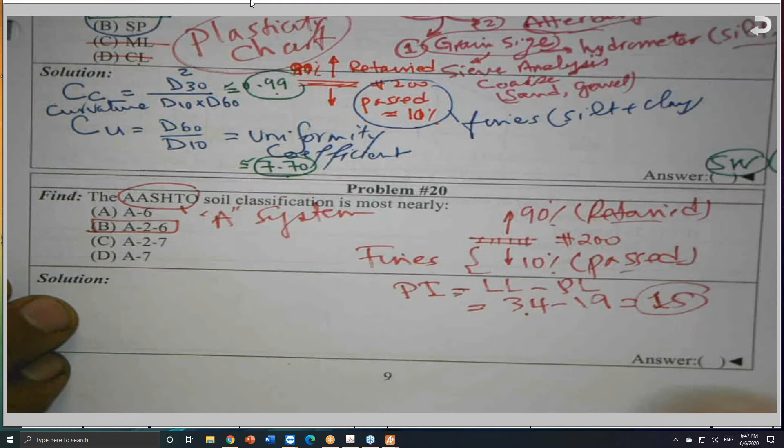And if the soil is classified A4 to A7, I need you to be aware of that, in the fine only. Okay? Let me - I don't like to use this example because, which is A7 or A6, A6 is good. A6, okay, not A26, let me just write A-6 and put a number in parentheses here. So if the soil is classified to be fine, they give us an additional number. They may be associated, so A6 and A-6 if the soil is, and they put what is known as the GI. So if the soil is classified between A4 to A7, and by the way, the A7 is divided into A7-5 and A7-6 based on these two equations.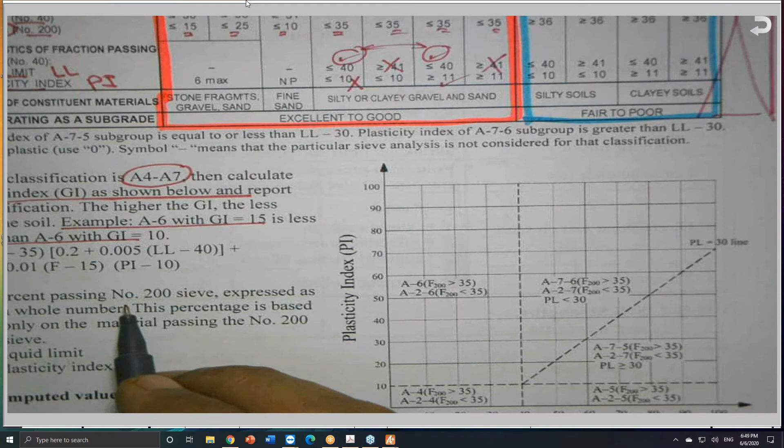And I have some problems, by the way, that we need to test to see if it is the soil A7-5 or A7-6 based on these two equations here. But let's focus on the GI, then calculate the group index. Okay. The higher the GI, the less suitable the soil. I needed to know that. And this is the equation for the GI.

So the GI is applicable to the fine grained soil only, which is the silt and the clay. So you will find that the GI is equal to F minus 35 multiplied by this liquid limit, plasticity index, all these things.

And if, by the way, just for the sake of making sure - if the computed GI is less than 0, because we have a negative, by the way, we use GI to be 0. GI cannot be negative. So the GI cannot be negative. So if the calculation indicated or ended with a negative quantity, less than 0, we use the GI of equal 0. And I need you to know that the higher the GI, the less suitable the soil.

For example, A6 with GI 15 is less suitable than A6 with GI of 10. Okay? So the higher the number for the GI, the less suitable as subgrade material. So the soil with the lower GI, the better. Okay? So this is one thing to remember. This is one of the cases, the lower number, the better. Okay? Like the blood pressure. Let me remember the blood pressure - when your blood pressure is normal or low, not high, that's good.

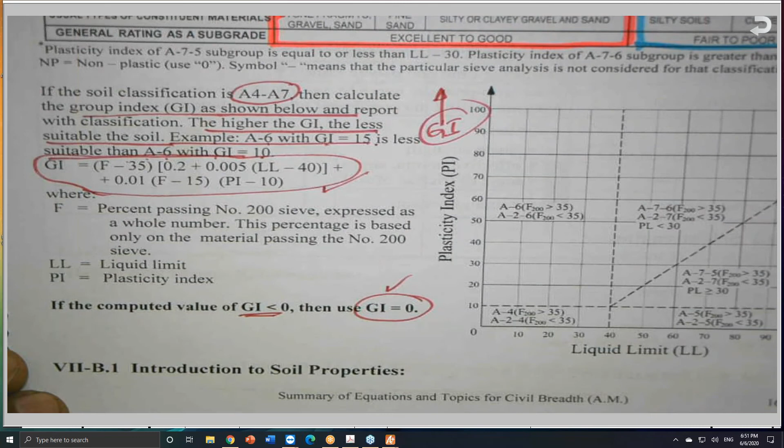So the same story with the GI: the lower the GI, the better, like blood pressure. Let me put it that way, if you'd like to remember it. There are some charts available in some textbooks for soil classification to make it easy, but if you follow this method, you will be in very good shape. So this is as far as the soil classification goes.

So the answer is B as in boy. When I scan it and send it to you, probably you didn't get my problems last week, so it will be very good.

While I was looking for this problem, I came across this problem here, which is problem 15 of the fall 2019. This is a concrete mix design problem. I talked about this before.

We need to pay attention to the adjustment.

I don't know how many of you solved it. Sometimes I add 'none of the above,' not to confuse you or challenge you. I know the actual exam doesn't have 'none of the above,' but let me give you a clue here, and you are very welcome to look at it. If you solve it, that's good news. If you didn't solve it, it's still good news, because at least you have a chance to solve it.

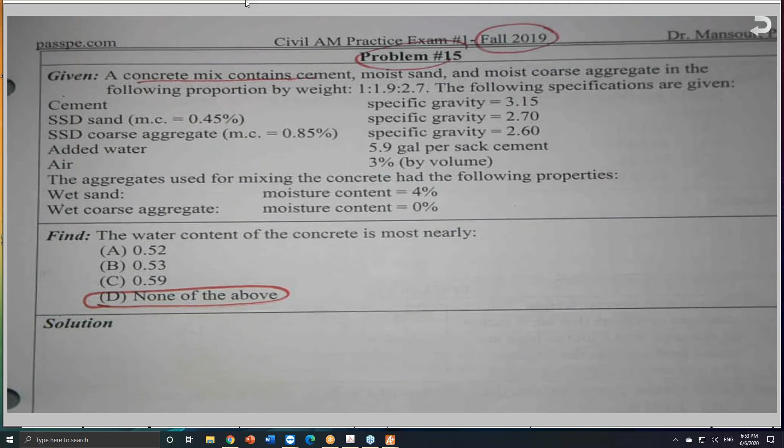But when we are talking about concrete mix design or earthwork, there is something common in between, which I indicated last time. So the concrete mix design or the earthwork calculations, there is some kind of similarity or analogy between these two as follows.

For the concrete mix design, we look to the SSD, not the stopping sight distance. This is saturated surface dry, my ideal condition. The aggregate could be below the SSD, which is dry. And the aggregates, fine and coarse, could also be higher than the SSD, which is wet.

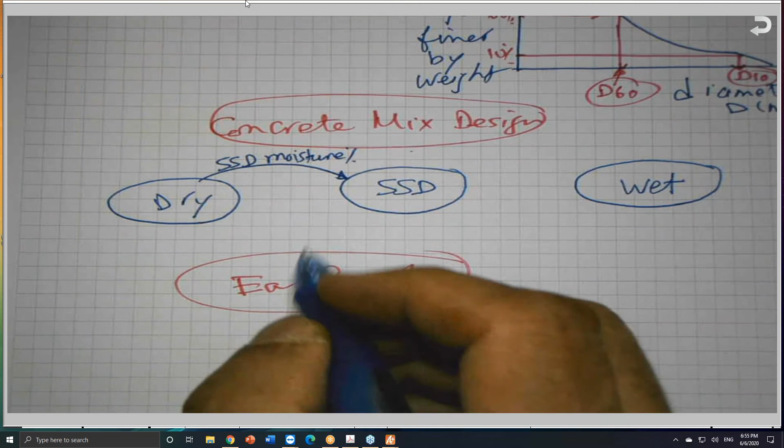If from the dry condition, either air or oven dry, to the SSD, we need to add more water, which is called SSD moisture content or moisture percent. But between the dry and the wet is the moisture content only, which is W, or water content, moisture / water content.

And this is how we make the adjustment, by the way. We need to understand this very well, because the most confusing part of concrete mix design is the adjustment for surface water. So this is the SSD condition, which is saturated - this is the ideal condition, the basis for design. If the aggregates are above the SSD, they are wet. If the aggregates are on the dry side, here we have extra water, here we have a deficit.

For the earthwork, we have something similar to this: the loose cubic yard, the bank cubic yard or cubic meter, and the compacted cubic yard, CCY. I always draw these two diagrams like this, and they are available in my books. I prefer diagrams, tables, and charts because you could remember these things easily.

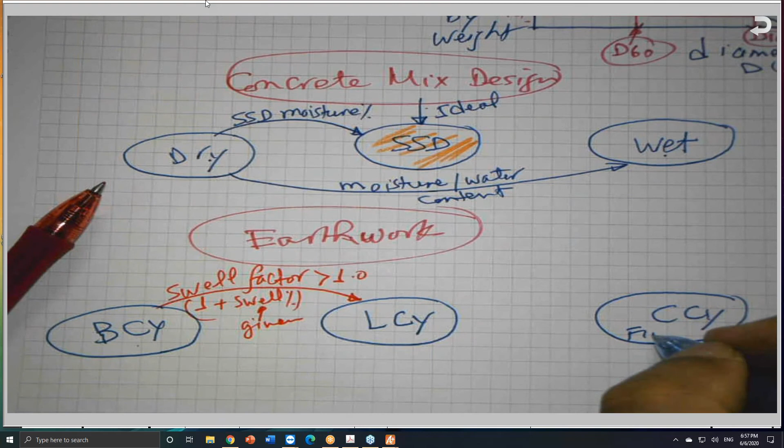Don't assume it. Between the compacted cubic yard, by the way, the compacted cubic yard is the finished product. This bank cubic yard is the soil in its natural state before excavation - natural, as it exists, as God created it. Loose cubic yard is after excavation. So from here to here, we have something called a shrinkage factor.

Which is equal to 1 minus the shrinkage percent. This shrinkage factor is less than 1 for all soils, except rocks.

For sand, silt, clay, name it, all these or mixtures, it's less than 1, but greater than 1 for rocks. Because when we blast rocks or disturb rocks, you cannot put it back again as it originally existed, as God created it - so it will increase in volume, it will never shrink. But sand, clay, silt, or any mixture, you will find that it does. So if we are able to remember these relationships in a drawing like this, I believe you will be able to solve these two types of problems so easily.

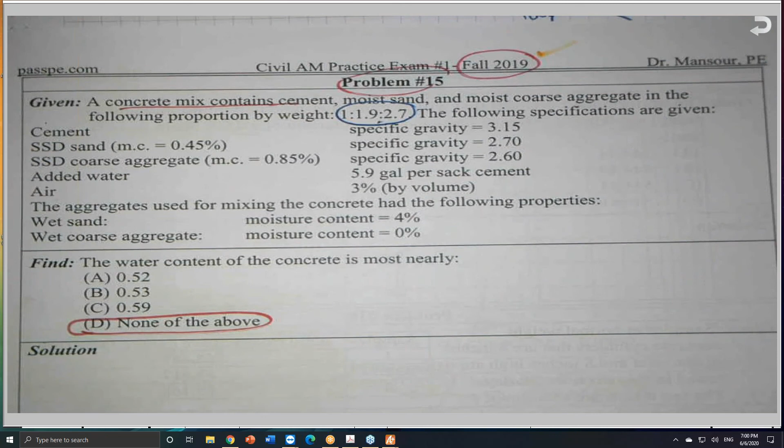He gave you that concrete mix has been prepared based on this ratio. There are two methods for mixing concrete: either the absolute volume method or the ratio method. The ratio method is the old method that my grandfather and your grandfather used to mix concrete. So the ratio means, for example in this case, 1 to 1.9 to 2.7. What does it mean? It means 1 part cement, 1.9 parts for sand, and 2.7 for gravel.

This is the standard notation for mixing concrete by ratio: 1 part cement, 1.9 parts for sand, and 2.7 parts for gravel. This ratio is normally by weight, not by volume. If it's by volume, it can be solved, but normally the ratio is by weight.

He's asking to find what is the water cement ratio, water over cement. And this is the ratio by weight, by the way. This ratio by weight tells you how many pounds of water to how many pounds of cement.

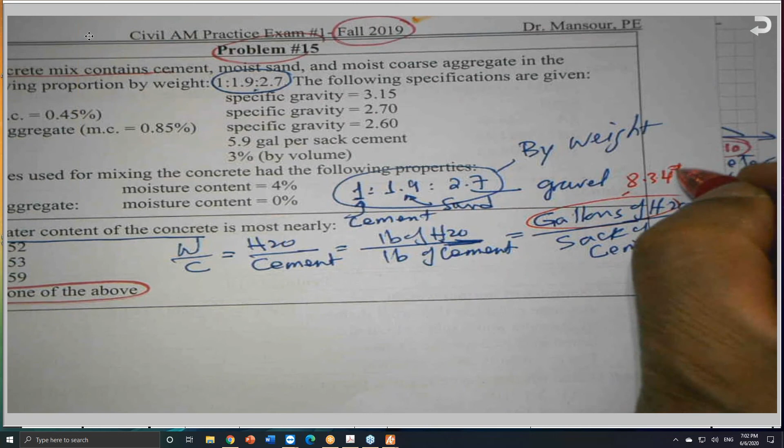Sometimes we express this ratio as how many gallons of water per 1 sack of cement. Because we know a gallon of water, as all of you know, is 8.34 pounds, and a sack of cement, as all of you know, is 94 pounds. So the ratio is by weight.

During the exam, I know we are relaxed here and you have some kind of tea or coffee or something nice next to you and you are sitting and relaxing. But during the actual exam, under the pressure of time, obviously you are struggling with time, so you are working extremely fast.

The specific gravity of cement is 3.15, and this is for all types. As you know, types of cement include type 1, type 2, type 3, type 4, and type 5. I talked about these types before, and there are some questions about which one is the most suitable type for certain applications. You need to know the 5 types of cement based on ASTM C150.

So for all types of cement, we use one fixed number: specific gravity 3.15. The SSD sand - the saturated surface dry moisture content for sand is 0.45%. What does it mean? It means that the sand, which is a fine aggregate, needs to absorb 0.45% of its own weight from the dry condition to reach SSD. This is what is meant.

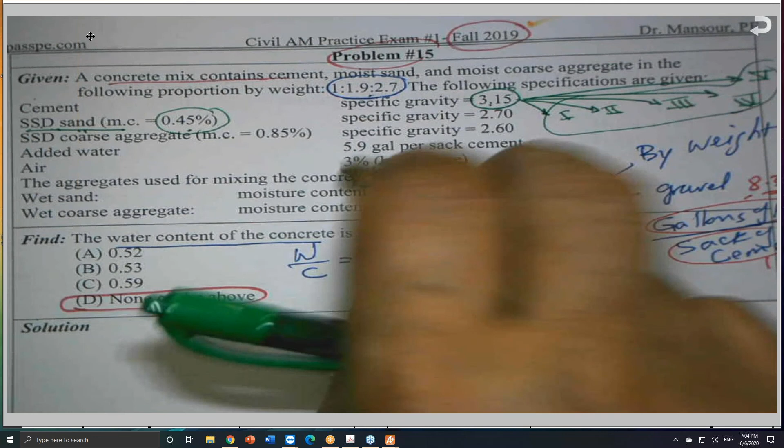So if I have a piece of gravel like this, and this piece of gravel is completely dry, it will absorb some water to fill all the internal holes or pores, so the inside is saturated and the surface is dry. It's called SSD, saturated surface dry condition. So the gravel is saturated, but dry from outside. So it will not give water, it will not absorb water. This is what is meant by SSD.

SSD means saturated and surface dry. It is saturated, but the surface is dry, which means it is self-sufficient as far as water goes. It will not give, it will not take. It's saturated to a degree that it will not give or take.

The second given piece of information for the coarse aggregate is 0.85. The added water - how many gallons per sack? He gave you 5.9 gallons per sack of cement. The air is always measured by volume, not by weight, because the air doesn't weigh too much.

The aggregate used for the mixing does have a moisture content of 4%, and the wet coarse aggregate has a moisture content of 0%. That means it's dry. So the sand is wet. I don't know if this is a typo or if I really meant 0%. I need to double check this, but we can calculate it and see. It could be that I meant 0%, so it is dry - there's no need to mention it if that was really my intention.

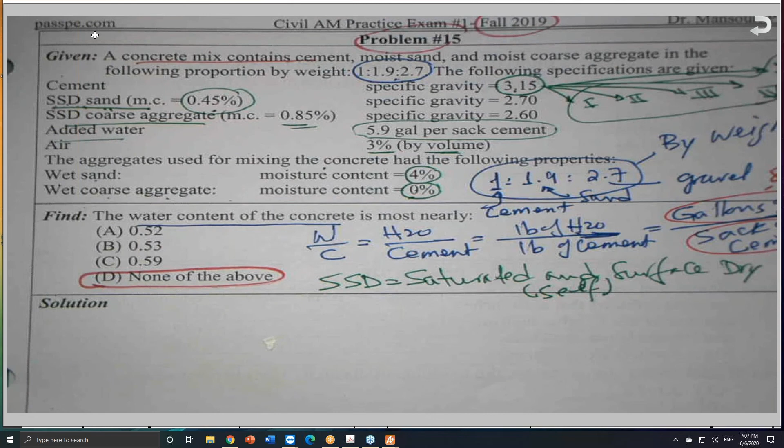Specific gravity for sand is given. Specific gravity for coarse aggregate is given as 2.6. Specific gravity for cement is also given. So we have a lot of information, and my ultimate goal is to get the water cement ratio.

Remember, he added 5.9 gallons. So if you'd like to look at the water cement ratio based on this amount of water only, the water over cement ratio, water he added at 5.9 gallons times 8.34 pounds per gallon, divided by sack of cement at 94 pounds.

If you calculate this ratio, sometimes they add this number to make it attractive for us to calculate and go home happy, but this is the wrong number for sure. So if you take 5.9 gallons and 8.34 pounds and divide by 94, it's 0.52.

Let me use the same color, 0.52. And you will find 0.52 is answer A, but this is not the intent at all. This is true only if both aggregates are at the SSD condition. But it's not — one has extra moisture content, and one is completely dry, assuming that this number is correct.

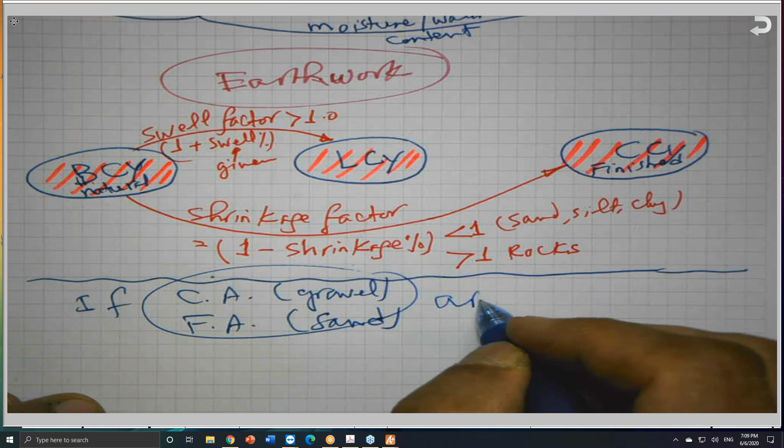So we do have what is known as the adjustment for surface water. If the coarse and the fine aggregates — the coarse aggregate, which is the gravel, and the fine aggregate, which is the sand — if either one of them or both are not at the SSD condition, then adjustment for surface water is required. And we need to know how to do this adjustment for surface water.